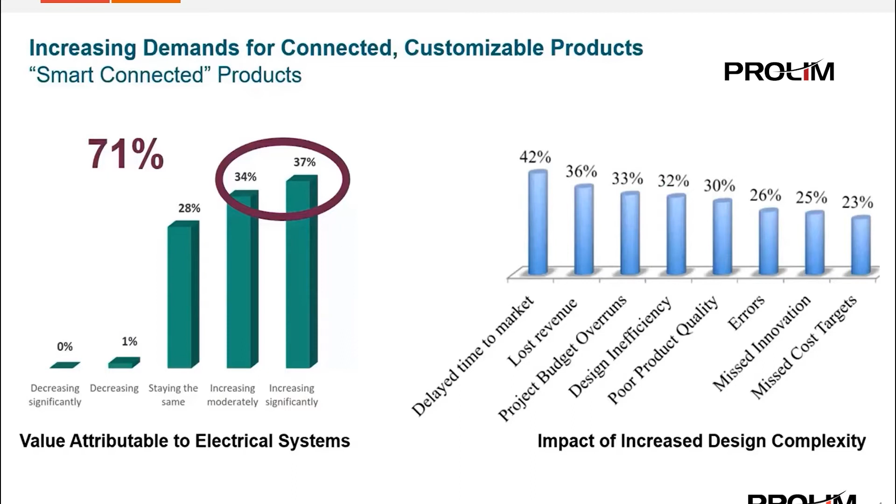Along with the complexities of electrical designs, a great deal of compliance and regulations must be adhered to. Not to mention all the industry and safety standards, these must be met. So it's vital that we have the tools that allow us the ability to control these measures and the visibility and transparency to show that these guidelines are being followed and met.

Like any new technology trend, you must be able to evaluate your current design processes, methods, and software put in place, and identify the areas where you need to improve or enhance, thus the Kaizen, so that you can really leverage and capitalize on this ever-evolving technology and its growth.

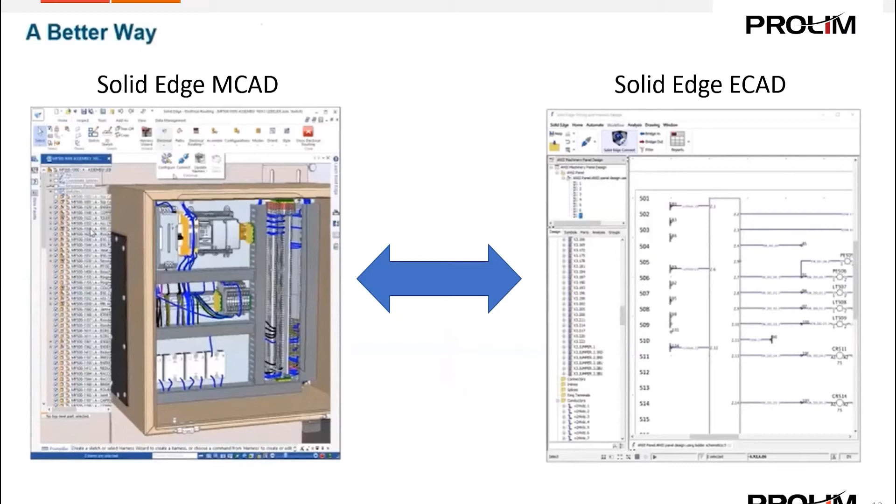Solid Edge wiring and harness design brings these two environments together, giving the user the ability to communicate and share data between ECAD and MCAD environments using connected mode, greatly improving the communication between electrical and mechanical teams, thus saving extremely valuable time and effort during the design phase.

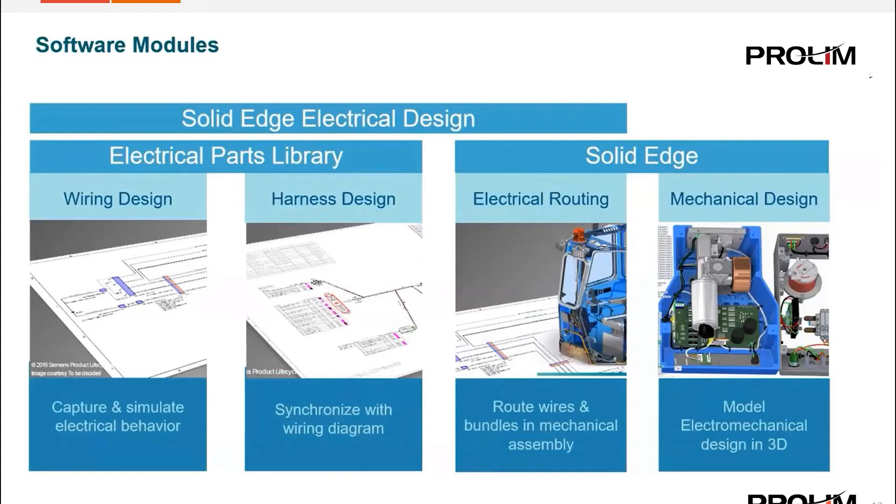It's important to mention here that both the wire and harness design environments can be run as standalone modules apart from each other in Solid Edge MCAD if so required. Many customers only require one or the other. The flexibility is there when you need it. This also makes the software much more affordable, only paying for what you need when you need it.

Here we'll see the value of intelligent diagrams and the electrical parts library. We'll also see styling and standardization and templates, so that all users are pulling from the same central library for their borders, commonly used parts, symbols, and design templates.

We also have design rule checkers. This allows the application to run real-time system checks in the background, consistently checking for electrical issues and validating the system for accuracy. Simulation is another valuable tool that is included in the software. Here you can validate the system by running a simulation to see if the electrical components are functioning correctly.

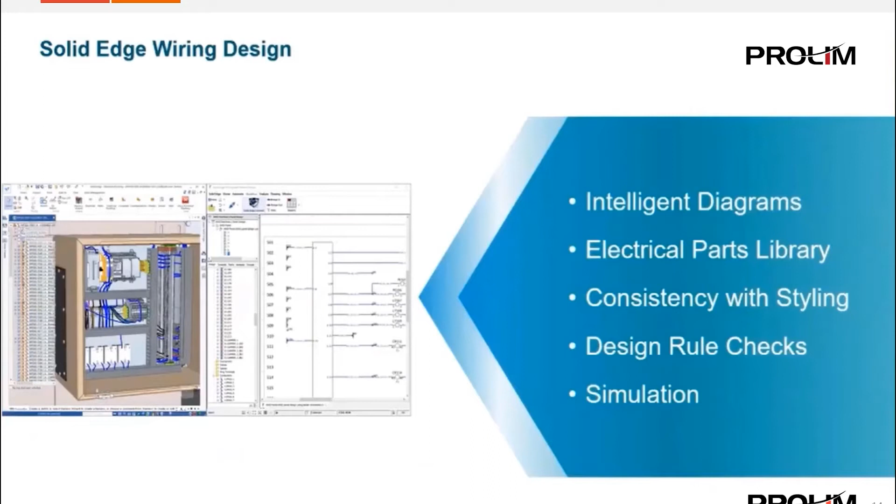For example, moving switches to different positions. We also have the ability to review currents, signal strengths, and voltage going through the wires. That helps us determine appropriate wire size and fuses required for the functioning system and optimizing our design.

The electrical parts library is another vital part of the software. Every seat of Solid Edge wire and harness comes with this included electrical parts library, with over 4,000 symbols and parts and growing that you have to choose from. IEC, ANSI, and other electrical standards are available for install.

This is where all symbols and parts are managed. As users build and add custom, commonly used parts and symbols that may not be included in the library, they are saved to the library so that the rest of the team can pull from them. One central location for all users to access standard components.

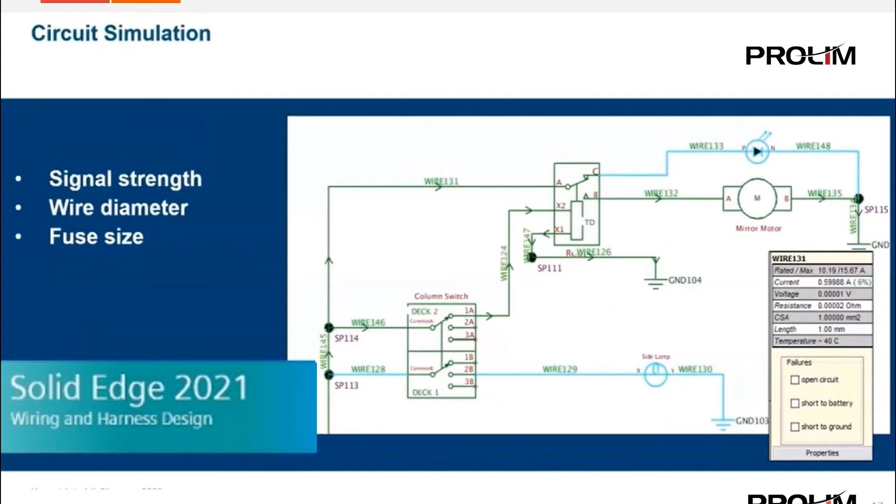For those new to the software, I want to spend a moment on the data flow for this application and its connected mode. Connected mode is a tool that allows us to share data bidirectionally between electrical and mechanical tools, as mentioned before.

Once the data is shared with the MCAD team, wires and bundles are routed throughout the assembly, and any changes needed—wire lengths, plugs, bundles, etc.—can then be shared back to the ECAD team so the electrical components can be updated.

Connected mode also has the ability to take harness design information from Solid Edge MCAD and convert it over to the harness design application. This is what's called 2D flattening—true synchronization at its best.

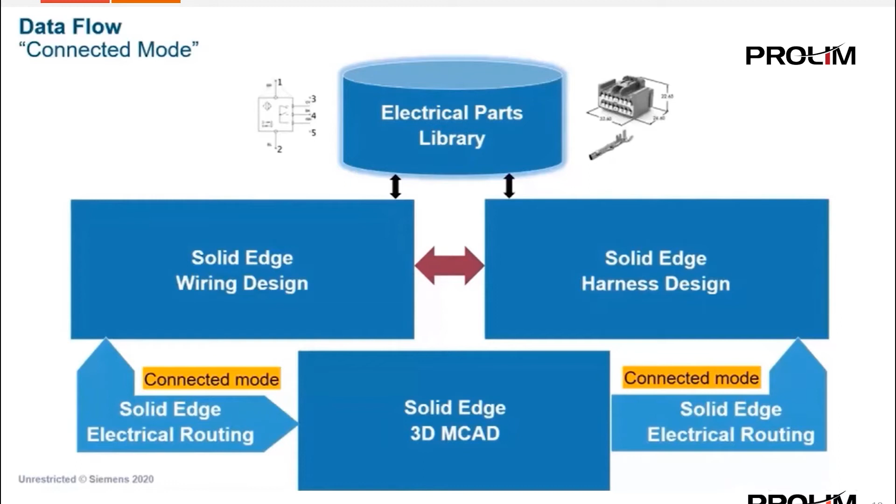Now let's go ahead and take a look at this in action.

Now that we've got the tool open, we'll go ahead and open up a project. I'm just going to use the default Quick Start project here for the Quick Start transportation. Click OK. Now we've got a project open, and you can see there are some categories here that we can select and expand upon.

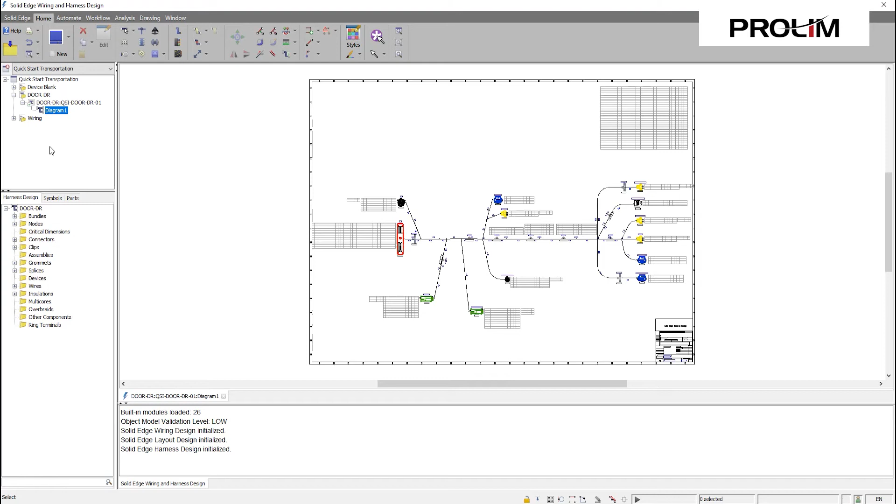I'm going to quickly, briefly look at a harness design. Again, this project can include harness designs and wiring all together in one project bundle. But just to give you a quick overview and a bit of understanding of how a harness design can look.

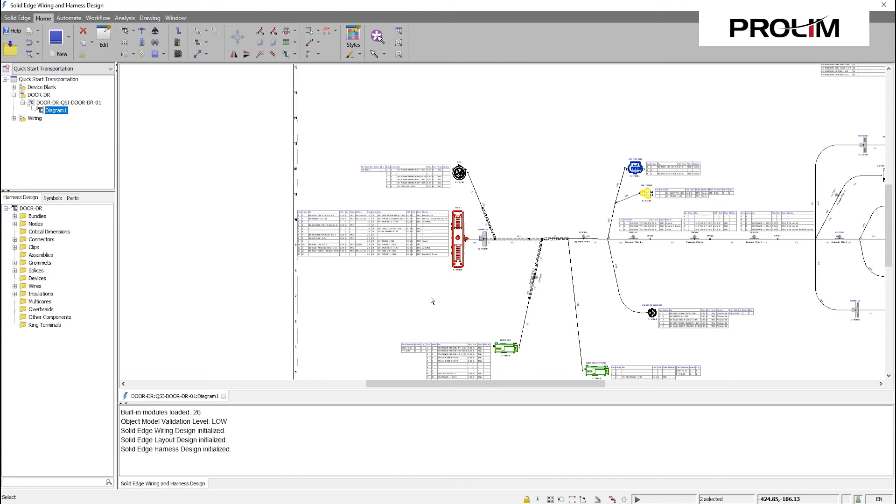So you have your device here on the left, identified by its components. This is more of a visual bill of material—you get the pin numbers, cavities, and a lot of information here. Again, this is all brought in using just the default parameters, but this can all be customized.

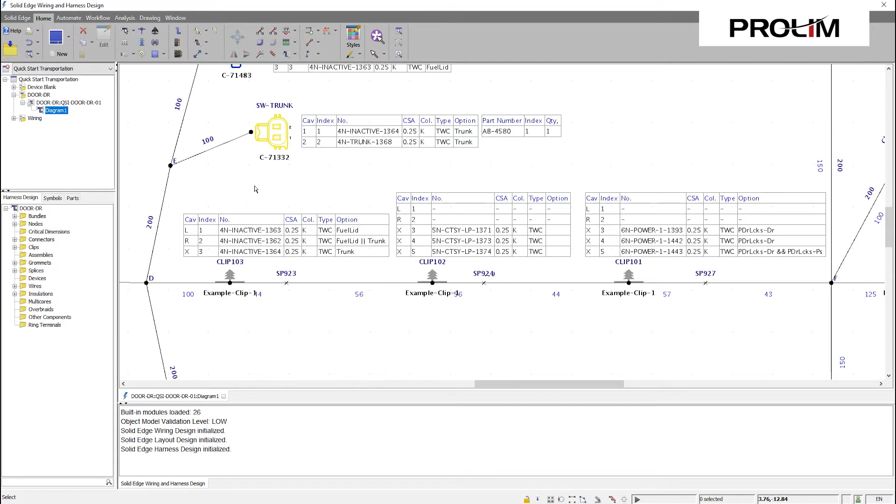I won't get too much into harness design for this specific webinar, but I'll be doing a future webinar to go more in detail into harness design. For now, we're really going to just stick to the wiring design at this point. So I'll go ahead and close this.

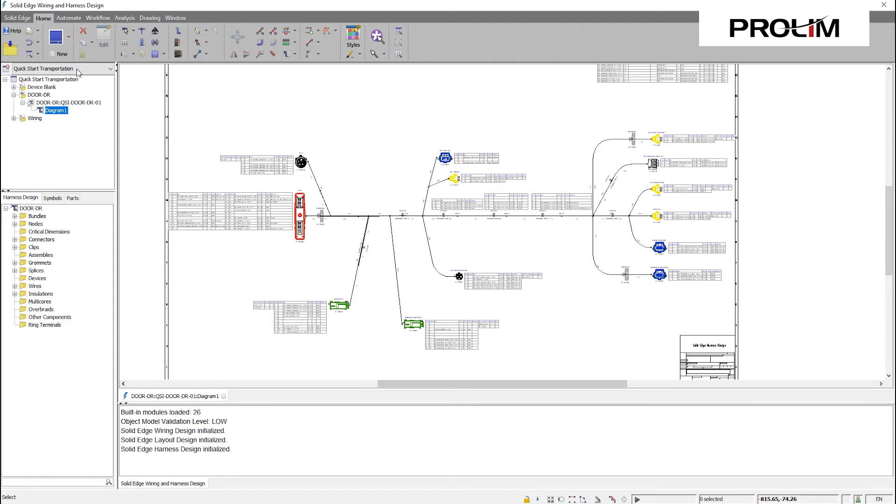Now you can see I closed that design, but the project is still activated and open. So now I'm going to go ahead and look at the wiring diagrams here, and you can see I've got 9 different options I can choose. Each one of these is a different design layout. So let's go ahead and open up these.

One thing to keep in mind on your browser over here: once we have a design or schematic open, we have this design panel. Anything that has a plus, you can see, has components attached to it, and we'll go into those a little deeper as we go along here.

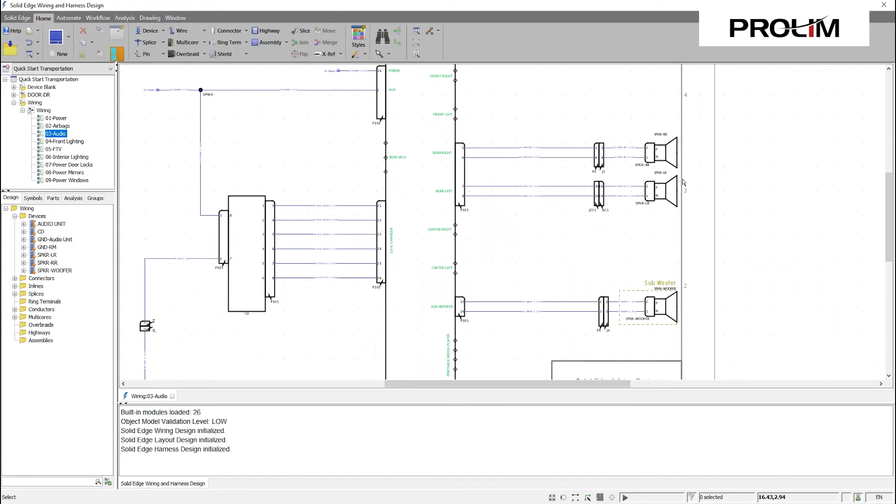Conversely, if you're in the design window here and you're looking for this and want a bit more detail as to what that is, you select it and it's going to highlight it over here in the design tab as well.

I'll briefly hit on how to navigate through this environment. The navigation controls are the same from the wiring design to the harness design. Most of the navigation controls are very similar to all other CAD softwares, but there are a few unique ones with this tool that are different from the others. It may take a little getting used to, but there's a cheat sheet available, such as these stroke commands.

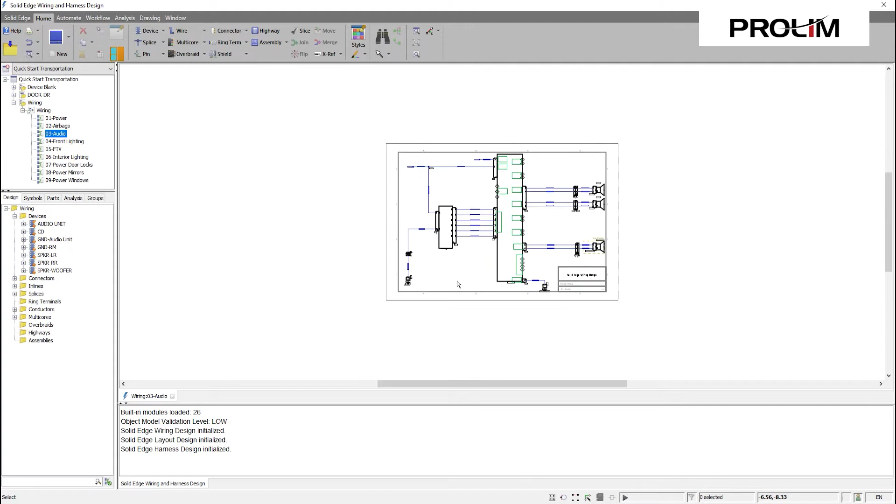As you can see, if I hold in my middle mouse button, it's giving me this red indicator here. Depending on what direction I'm going in, you can see I'm zooming out in increments. Now if I go the opposite direction, I can zoom in. I can also zoom in entirely too far, and then I can zoom out or zoom all.

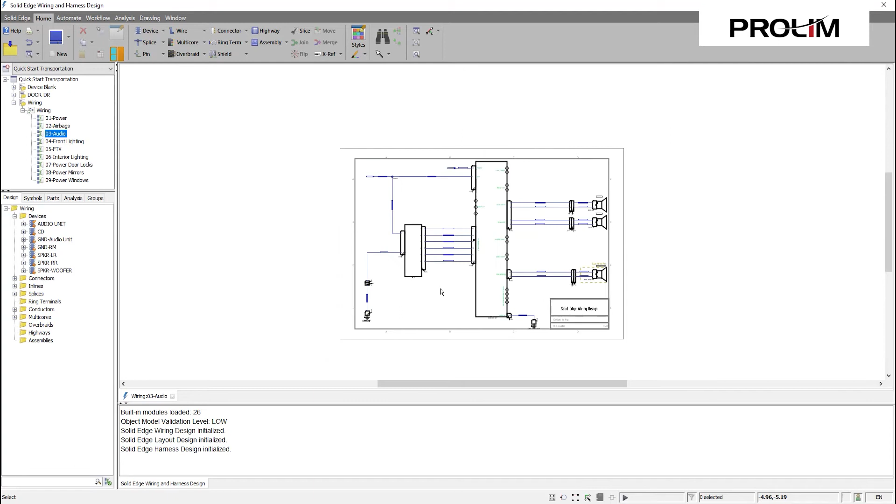Your middle mouse button works as it does in Solid Edge, zoom in and out, scroll up and down, but we won't get too much into that. When you first get into the tool, especially if you're bouncing back and forth from Solid Edge to this, it might be a little tedious. But like I said, within a few days of being exposed to and understanding what those tools are, you pick them up very quickly, and it's not a big deal. It's just kind of a unique tool.

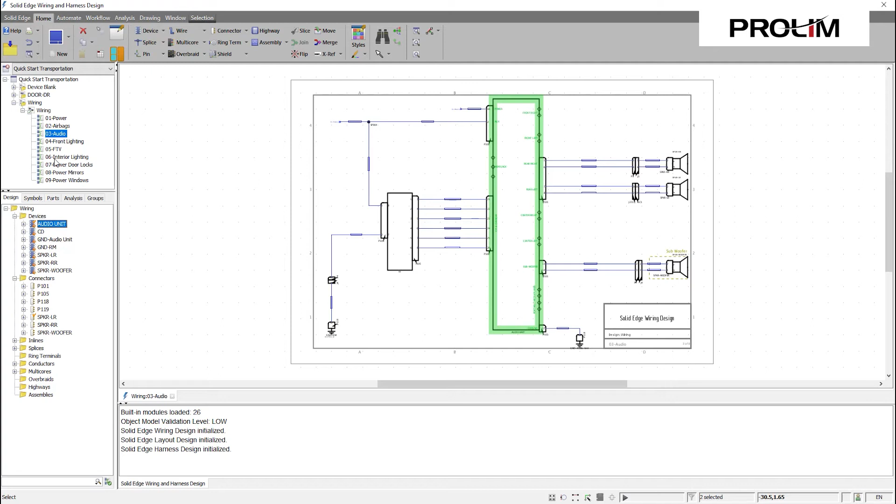As I mentioned before, when you select a device or a connector here, we're able to quickly visualize what's here. We've got 9 different pages that are all part of this one project, so we're currently only looking at what is relevant to this one design, sheet number 3. But we do have the ability, if we know something is part of this design but not on this sheet and need help locating it, to toggle between showing just what's relevant to the particular sheet or clicking this to show all the devices.

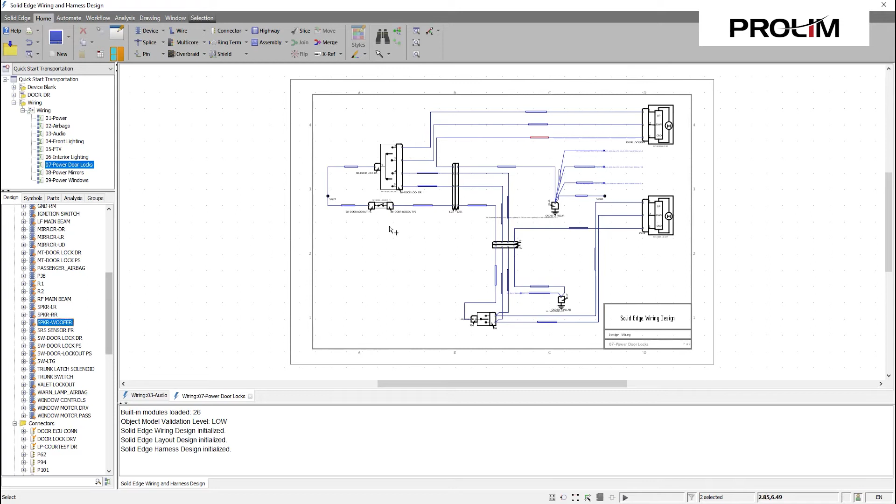Which is really handy. For instance, if we want to find this speaker subwoofer, let me change sheets here. Let's say we wanted to locate this subwoofer that's on another sheet. If we find it here and click it, it's not showing up anywhere on this sheet. So if we just hit Z, it takes us directly to that location. It changed from sheet 7 to sheet 3 and takes us directly into this area, zoomed in, so we can now configure what we need to change or locate accordingly.

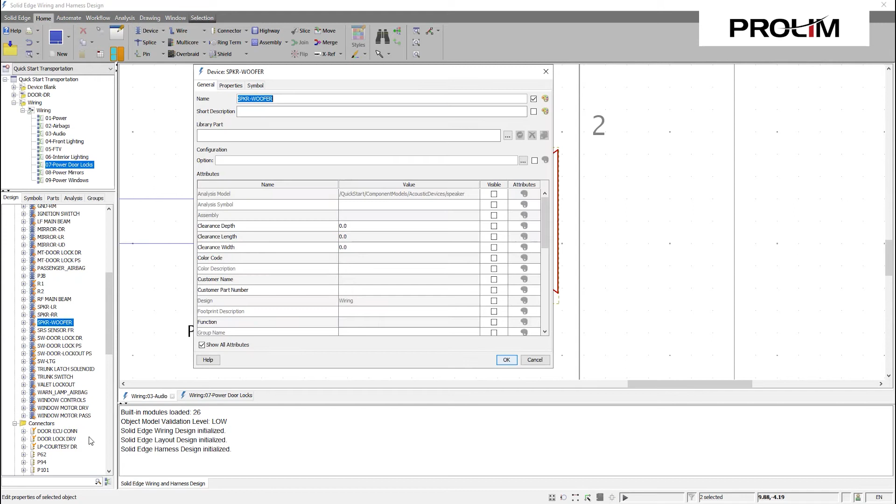Speaking of changes, if we wanted to change this device, we can right-click on the part itself and go to Properties, where we have the ability to manipulate, change the name, or swap it out with another part from the library. We can also see other information in regards to this specific part. At the same time, we can right-click on the actual component itself, go to Properties, and we're back at the same location. So there's a lot of different ways to get to the same information.

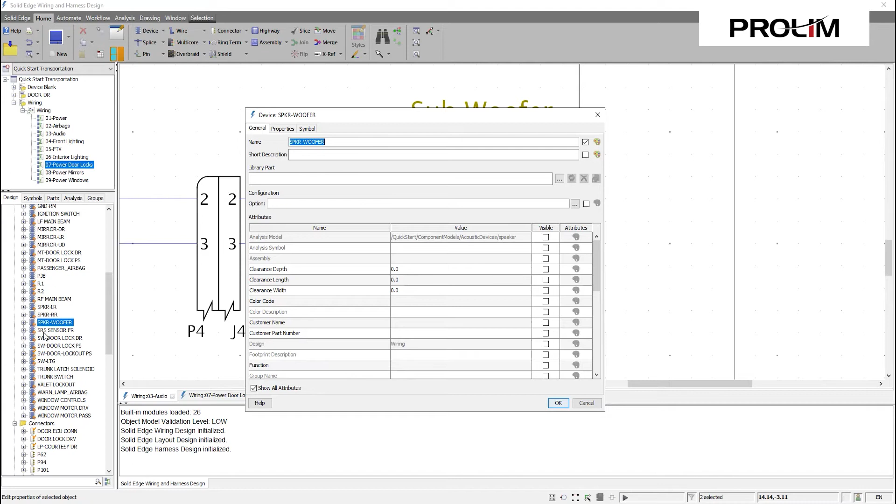Depending on where you're at on your display screen, it might be quicker to right-click directly from the design panel, or if you're in the graphic window, it's easier to just select and right-click directly from there. Again, another really cool feature that's accommodating and fast-tracking your design process as much as possible.

Next, I want to talk about off-sheet references. Off-sheet references seem to be a pretty common question when customers or potential customers are looking at this new software, wondering how you can configure off-sheet references, and whether it allows them at all. The answer is yes. That is set up by default, and not only is it set up by default, but you also have the ability to manipulate and control those templates depending on your company's profile.

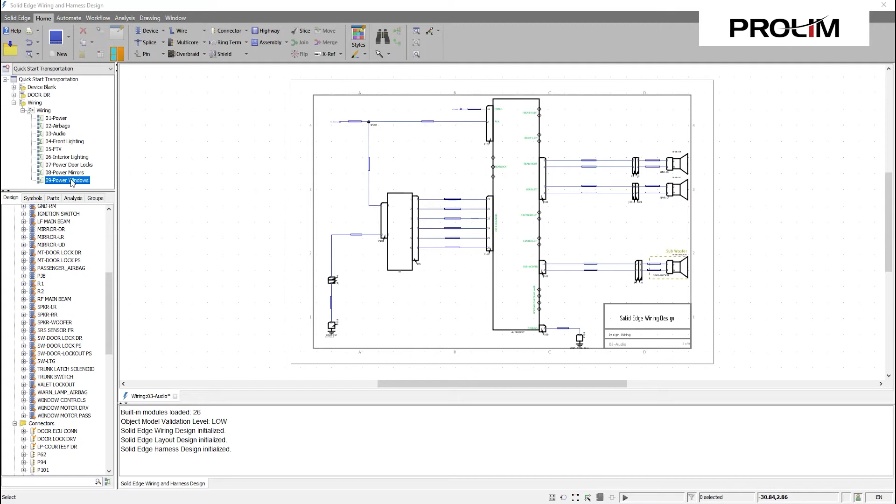So let's go ahead and open up this sheet here. I think this has some off-sheet references. As you can see, this wire is being referenced to another sheet, and these 3 wires, let's just look at this one for instance, looks like it's on sheet 4. The cool thing is the naming convention is dummy proof, it's going to tell you exactly where this wire is also used or being referenced to or from. So it's on sheet 4, front lighting, and you can see that's this sheet here.

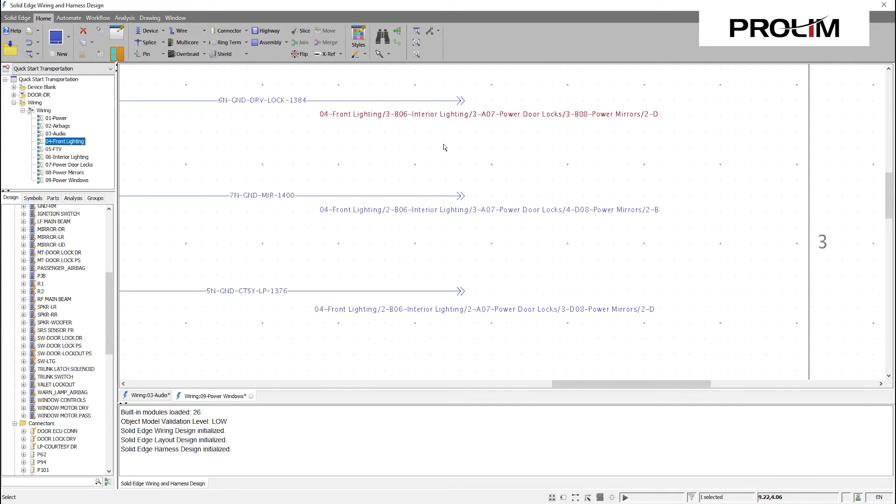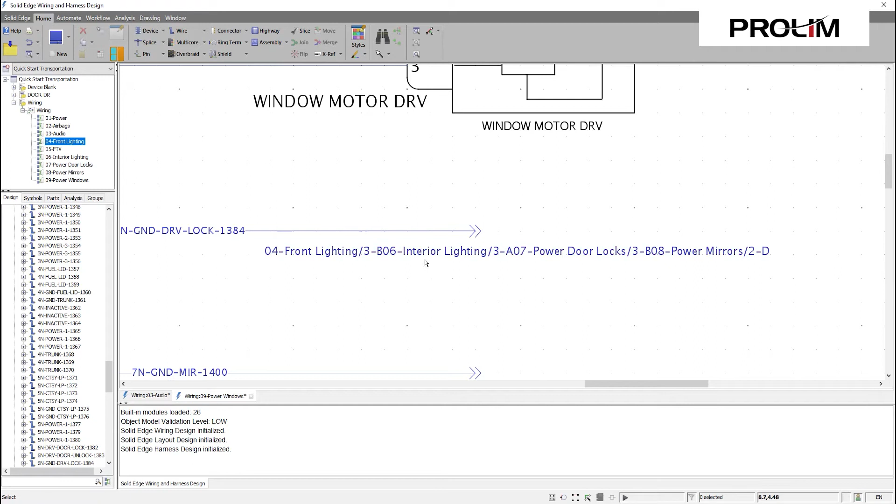The 3-B is going to be the grid location. We've got numbers and letters here to give us a more general idea of where that might be present. You can also tell that this specific wire here is being used on sheet 6, sheet 7, and sheet 8.

To briefly hit on how you would change these to set up your own company standards, you simply right-click on the property, go to Style, and then Edit Style. This opens up this dialog box, which has all the information you'll want to set for your specific needs.

This is for setting up your templates and the way you want these things to look. You can add additional parameters to look at, or remove parameters, but all very easy. From this attributes section, it's very easy to apply the styles or exclude certain parts of the styles.

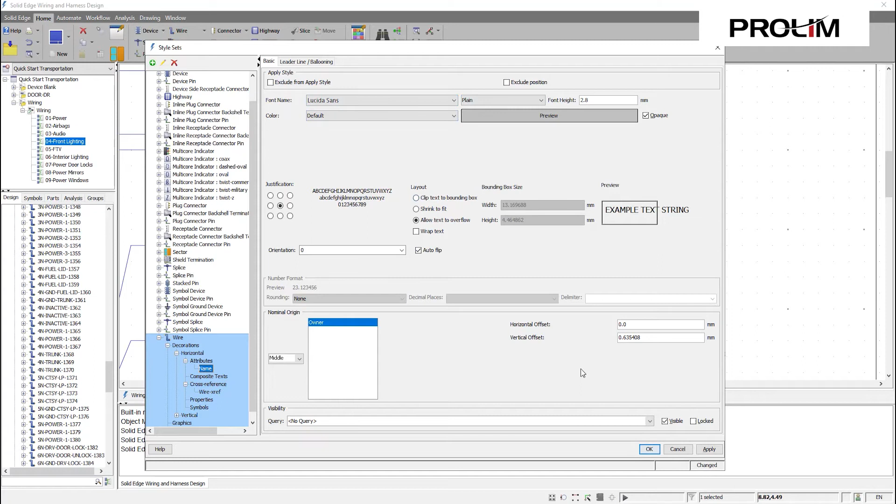Now that we've explored some of the basic functionality of the wiring diagram, let's look at exporting out a project. This is an existing project, and shortly we'll go through creating a new wire diagram so you can get a feel for how to create these things from a high level view. But for now, let's say we've got a project complete, and now we need to export this out to share with the rest of the team.

If we go up here to our Home tab, we have this print control. In the dropdown we have print and print to file. We'll go ahead and select print to file, and we're going to output this as a PDF. It's a pretty common exporting format that most people can use if they have access to just a simple computer.

You can see here we have the option to select either the entire project to convert, just the specific design we're looking at, or a diagram in specific. If we just wanted to use one of these diagrams, we have the ability to do that. But for now, we're going to go ahead and just do a design.

We want to select PDF now, but you do have the option to output this as a DXF, a CGM, or an SVG file. For now we'll just select PDF. Again, we can configure that if we wanted to go in here and make some changes, like color it from black and white to color. The black and white, at least for this setting, doesn't work too well, so we'll use color.

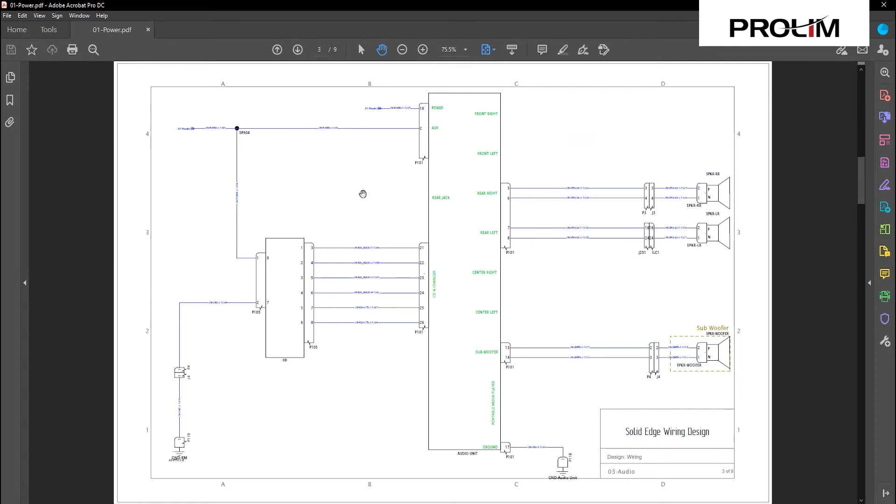There we go. Now the PDF has been converted. You can see down here in our window that it's done converting. The cool thing is now we don't have to navigate to that, we can literally just grab it right from here. So we double click this text, pulls up our PDF, and you can see now we've got all 9 sheets right here, very easy to use, laid out in the same order as the design itself.

If we look at our bookmarks over here, we have previews of each one, and each one of these titles has been brought over as well. So again, a very simple, easy to use exporting option, a great little tool, and we can save this out and now share it with people that don't have the actual tool for review, whatever it may be, even for installation if that's the case.

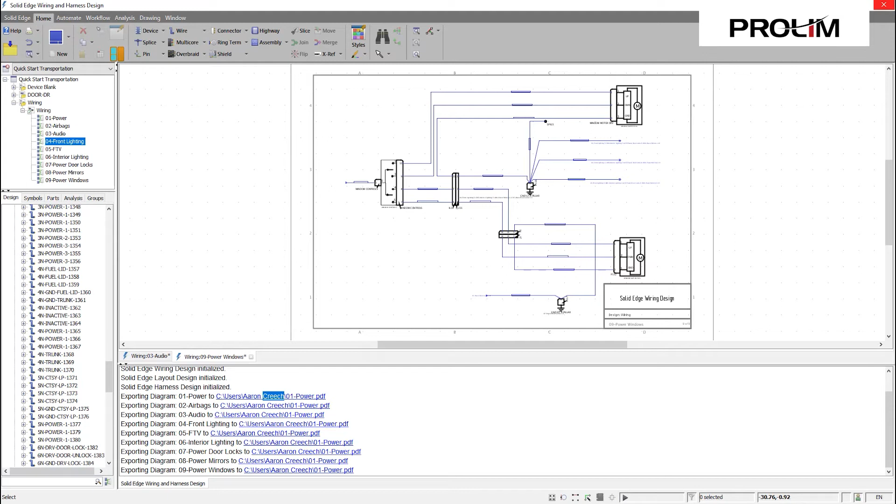Now let's explore the toolbox a little deeper here with our existing project. We'll go over to the Drawing tab, and you'll notice we've got this handy little Add Diagram List table. If you hit the dropdown here, you see we have the ability to generate a diagram list, a device list, a wire list, whatever we're looking to pull from. So I'm going to go ahead and do a diagram list for this part here.

You simply select it. I don't have to select any of the parts. It already identifies that I want to create this list on this specific sheet.

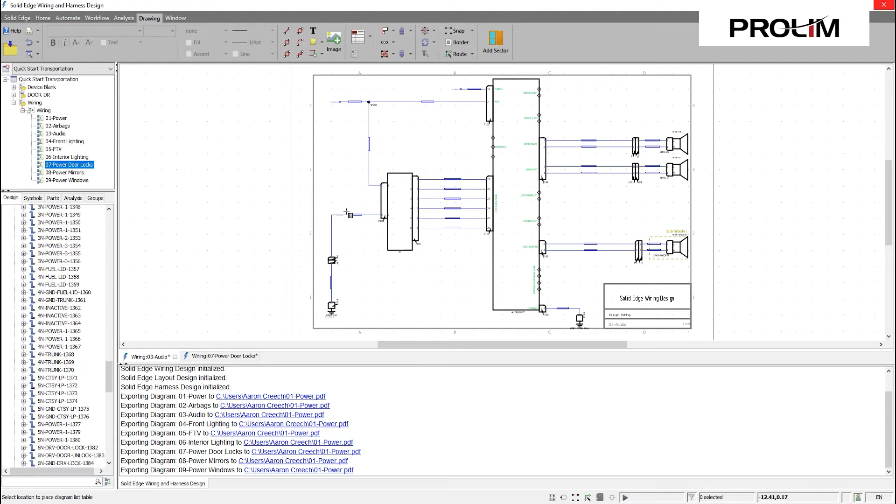So again, you can see my cursor's got the little graph on there, so it's already telling me where you want to put it. Go ahead and place that here, zoom into it a little bit, just to get an idea of what this is looking like.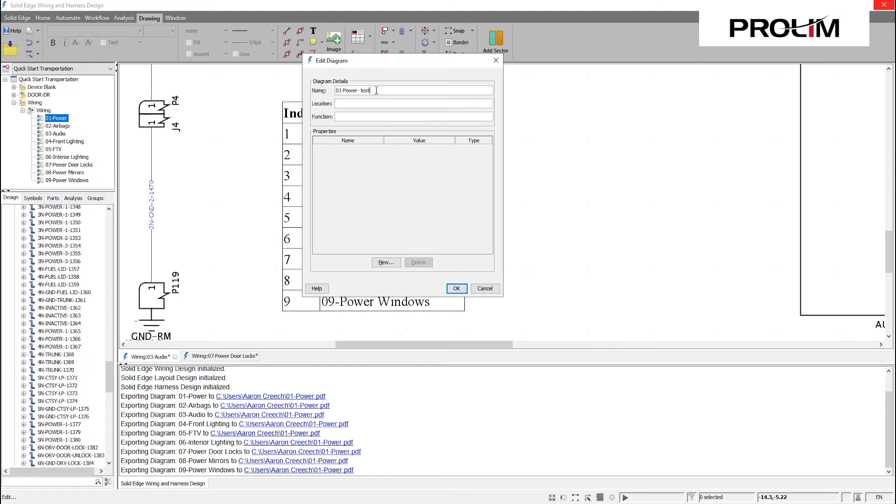So again, it's giving us a diagram of all of our sheets, the names, and this is all dynamic. So if I wanted to change any of this stuff, let's go ahead and change power. I'm going to edit this, I'm going to add test. You see that changes immediately, and it also goes to that sheet.

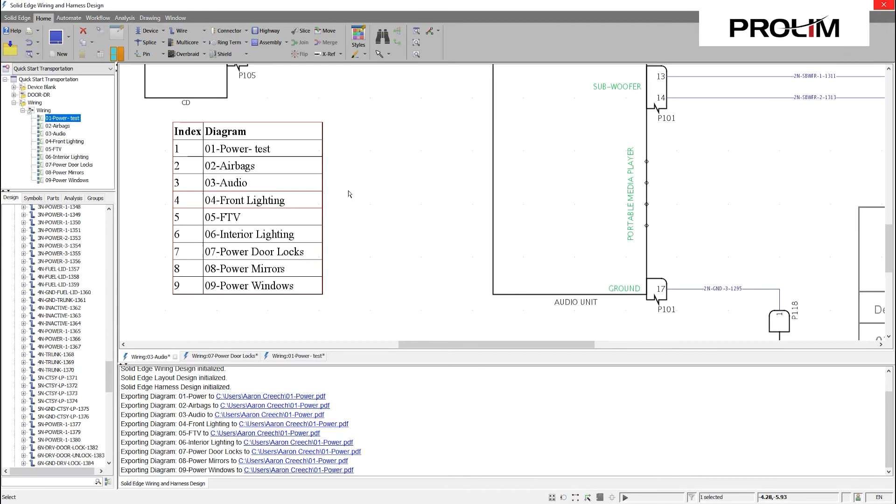So if we go back to our wiring diagram, you can see it's here, and now it's relabeled that tab as test as well. So you change it in one location, it's changing it across the board, which is a very handy tool. And again, you can move this anywhere. You have the ability to go in and add some additional columns if you needed.

But let's go ahead and move over to another sheet here. So we'll look at another, back on our drawing tab again. Now this time we'll do a device list. What this device list is going to do is populate all the devices needed for this sheet. So depending on the complexity of the design, when we drop this here, usually it's a pretty big list.

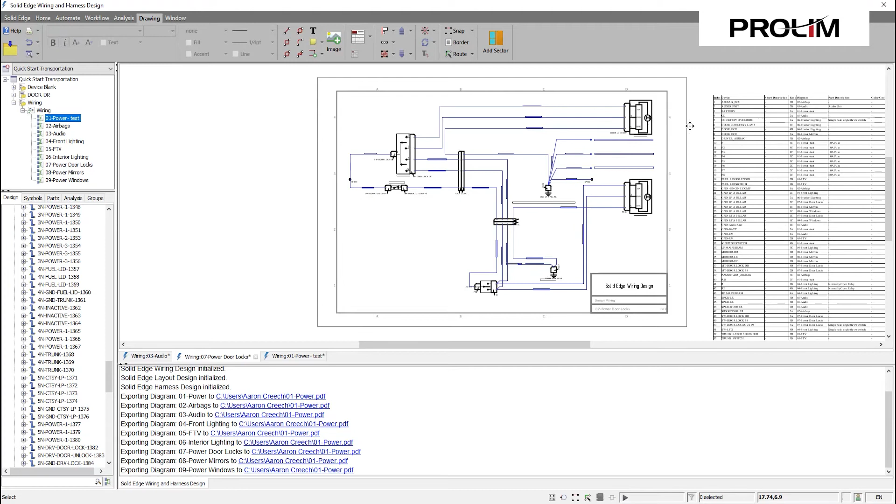So we'll put it over here for now. And you can see I'm not having to do anything, I don't have to select anything. It's just populating that based on the intelligence and the information that it already has there.

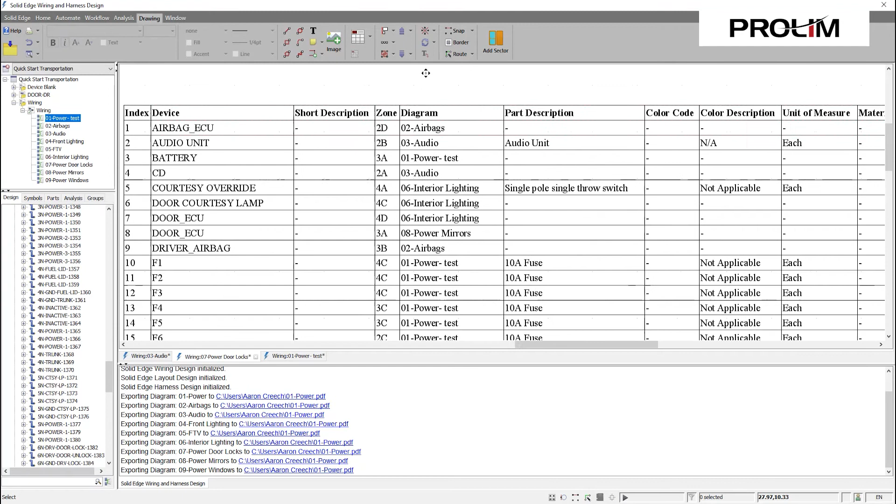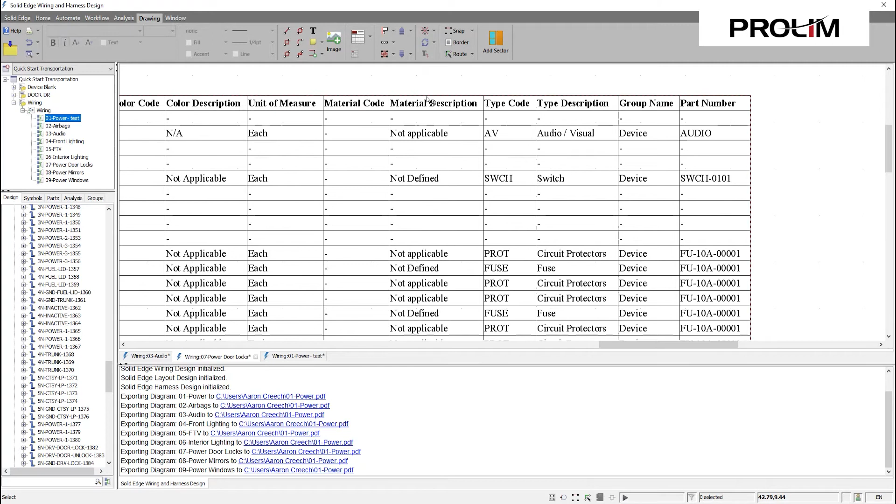So we'll zoom in here, look at it a little closer. And you can see that we've got a full list of all the devices included in this sheet, what diagrams they're associated to, a part description, and a ton of information that's here just by default. And again, you can go into your style sets and change and add and remove any of these columns as you see fit. We can move this thing anywhere we want it to be.

This would probably go in a separate sheet, but again, just at the very simplest form of creating documents. It took me a second to create that.

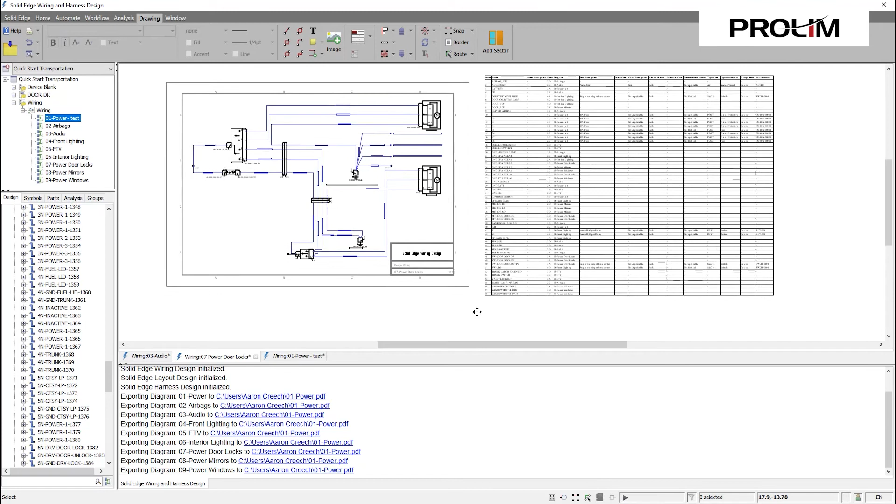And try one more, we'll go into this sheet here. Now we'll do the same, and we'll just do a quick wire list. This one may fit - nope, it's even bigger. So this is going to give you an even closer look at each one of the wire names, where it's coming from, what pin connector it's attached to, what cavity it's connected to, where it's going to.

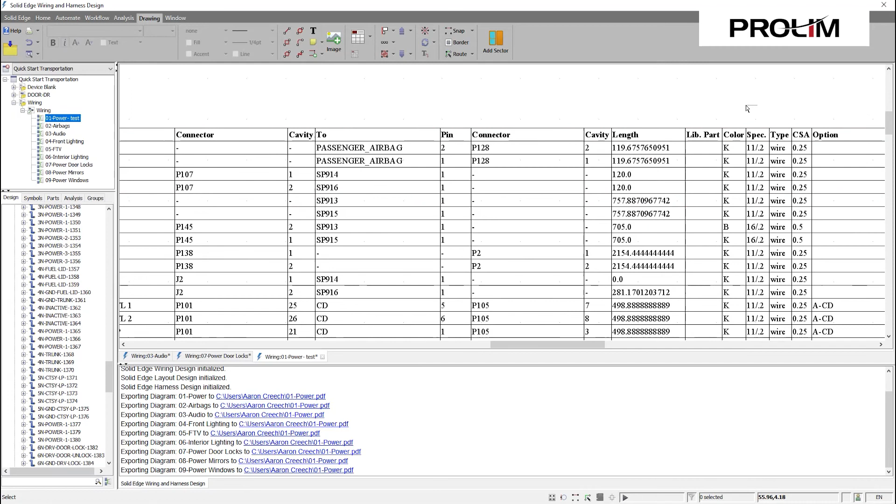And then you've got your full length here as well, so your cable lengths as well. Again, this is all just default information that is given to you. So very handy, and that's going to be a big Excel sheet there, but you get the point. It's very easy to create these basic lists.

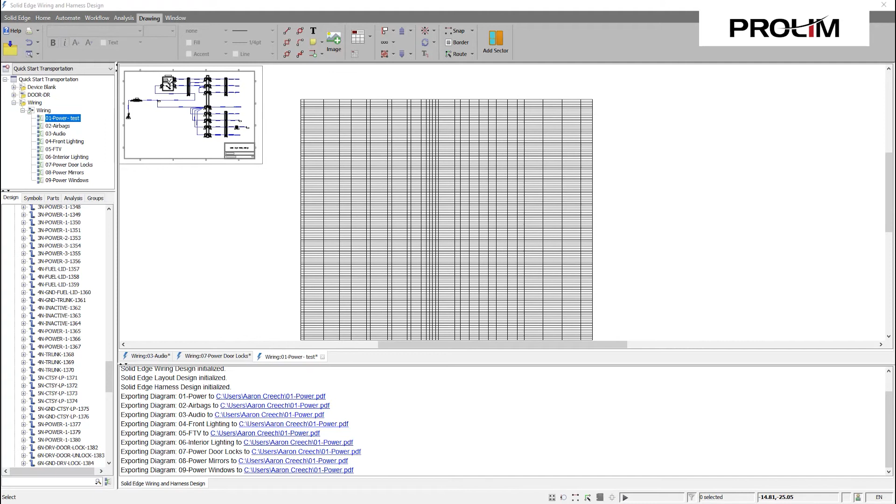So also included in the software is a really handy reports section. If we review the workflow tab, we can see here we've got this really big reports command, and it's got another drop down. So we have the ability to go into create reports, and there's already some pre-populated reports in here.

All of these are pretty common reports. Just to look at a few, you can do a connectors list, you can configure wire lists. We're just going to look at this design wire list, and let's view this report real quick. Generates.

Now the reports default to an HTML export, but you can see it's a pretty intuitive list. It's got all the information you would ever need in order to have these wires cut, and to give off to your purchasing department. Very intuitive list. And you do have the ability, once you have this open here, to save this and print it either as an HTML file or a PDF.

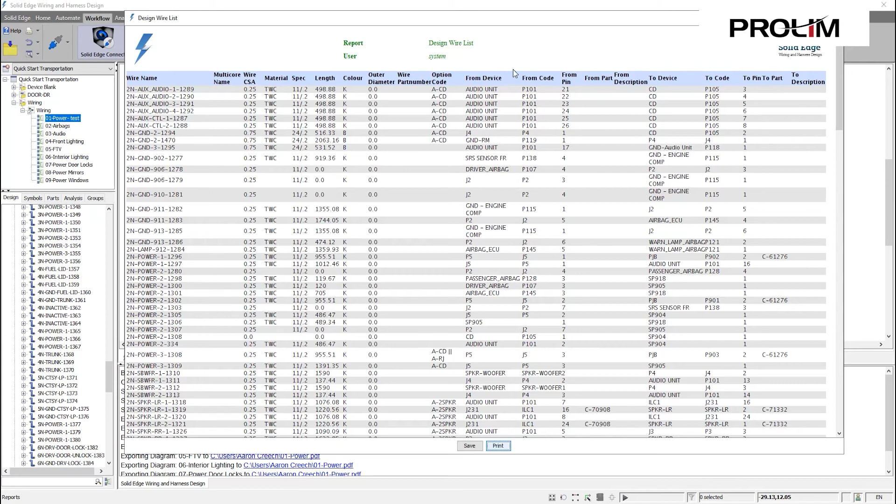This may take a minute, so I'm not going to actually do it, but if you have a CutePDF or Adobe PDF Writer, it just prints directly to a PDF. Again, these are just the default lists. You do have the ability to go in and build your own lists, and I won't get into building them too much. This is just an overview. But this Help tab will actually pull up very intuitive, user-friendly instructions on how to create your custom reports.

That's kind of a brief overview of how to work within an existing project. Again, there's a lot of tricks and tools this application has that we can really get into, but I just want to create an overview so you get a brief understanding of its power. As I said, I will get into much more detail in a few upcoming webinars for people that may not be familiar with this software yet. So I'll go ahead and close this file.

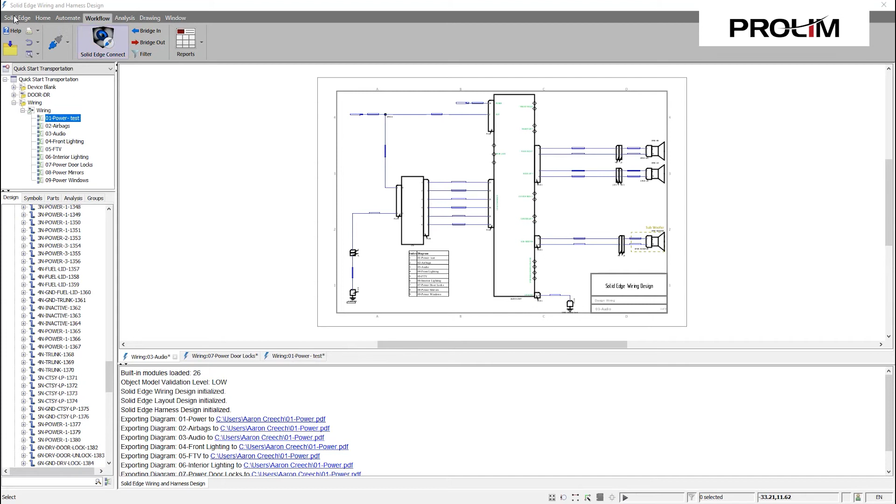Next, we're going to look at stepping through the process of creating a simple new design. We'll create a simple circuit, and then run a quick simulation on that circuit to feel the power of the simulation and see how easy it is.

I still have the current project open, but there are no designs open. So I've got a couple of different options to create a new design. I can right-click on the project header and go to New Wiring Design, or I can go up to Designs and select New Wiring Design from there.

Now we have the ability to create our name, and I'll show you something here. I'm going to name this Wiring, and notice right off the bat it's red. This tool is very intuitive, and it's restrictive as far as being able to have multiple devices or components that have the same name. It really tries to prevent you from having duplicate objects that may be a little different but have the same name. So this is one of those handy visual warnings, helping you get over that challenge. So I'm going to go ahead and just create the new design.

Again, you have some ability to determine the location or functionality. I'm going to just go ahead and hit OK here. And again, working with a default installation that I've got, there are no styles or borders set up. I don't have anything really set up here. So you have the ability to go into the settings and create your own custom company templates and borders.

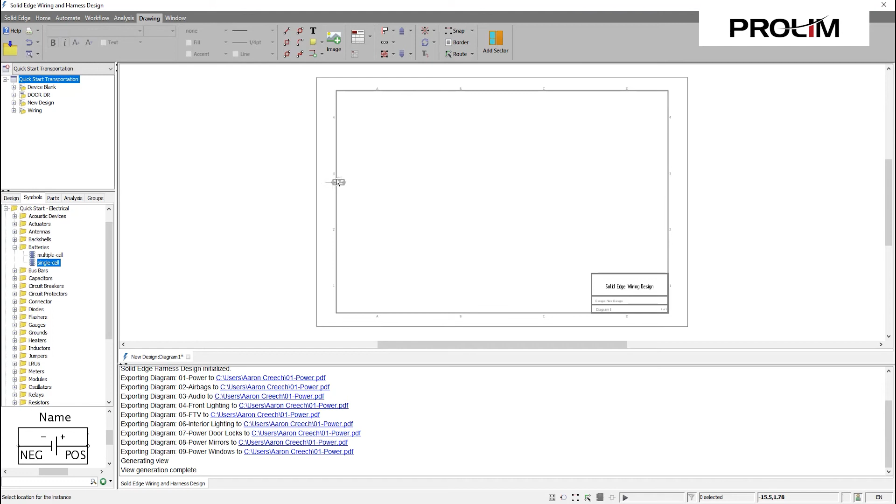It's simple, just double click, and you can see I'm bringing it in here. Now one thing to quickly identify is that it's snapping to a grid. So this Solid Edge Electrical tool uses a minor and major grid point.

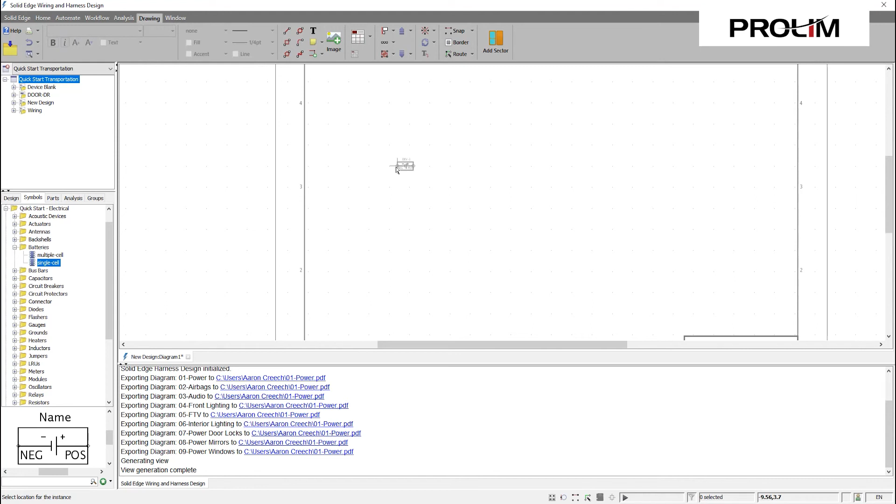If you're experienced using 2D schematics in an AutoCAD environment, where you can put things wherever you want, this is one of those control mechanisms built into the system to keep you from putting things where they may not belong. As we build this, you'll get a better understanding of why that's necessary.

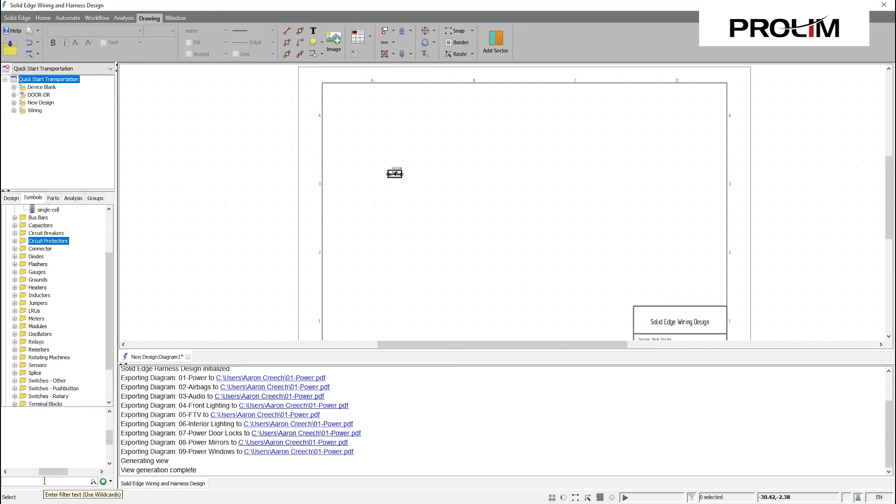We'll select this and drop the battery here. One thing to keep in mind is we're able to search for the battery and it gives us a couple of different options. But notice at the bottom there's a little browser window, so we can also search and filter by text. If I just type in battery, we quickly see just the battery type, which is handy when you've got a ton of parts in here.

Search for switches, and now it's going to just show us switches. We can look for lamps, and now we're only seeing the filtered results. So it's nice to be able to see everything in case you're not sure what you need, but it's really good to have that filter mechanism built in as well.

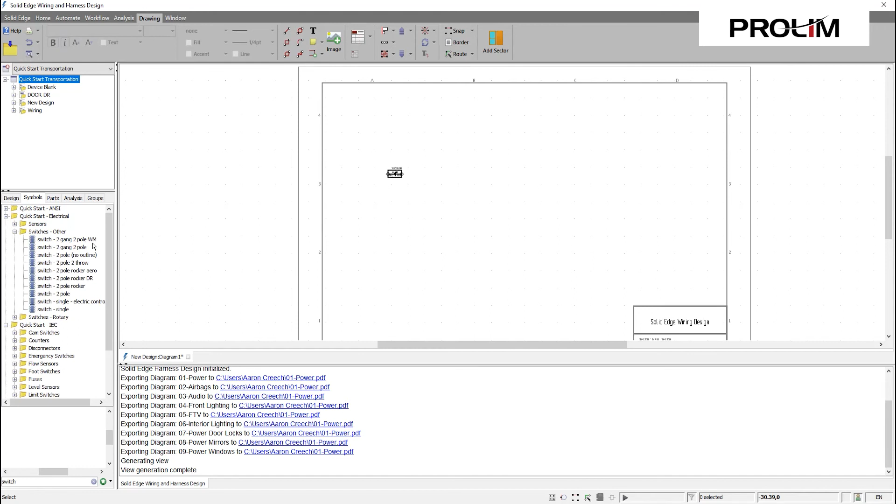We'll go to the others here and look for just a single switch. We'll bring that in, and again you can see how it's aligning up. So now we've got our switch in place, and now we'll search for our lamp. Let's grab this guy.

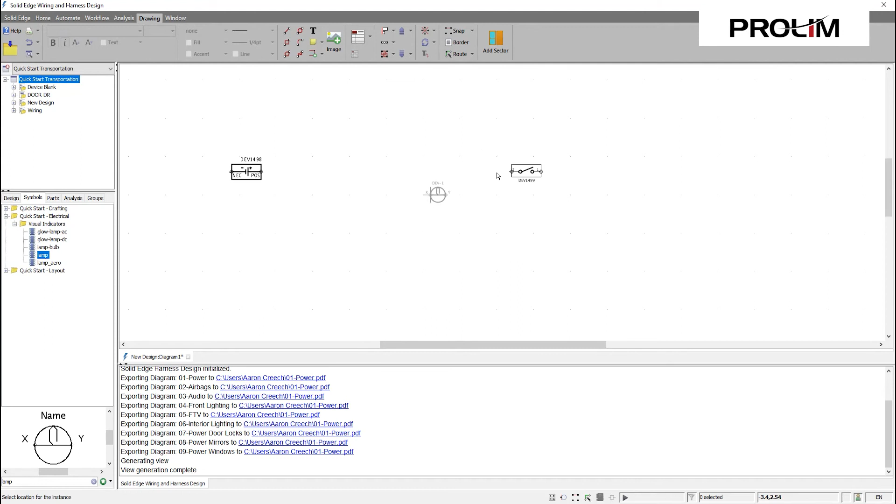Now all we need is a couple of grounds. Put this guy down here. Another cool thing is if I just select this, hit Control C, Control V, now I'm able to copy and paste those as I need. So pretty user friendly.

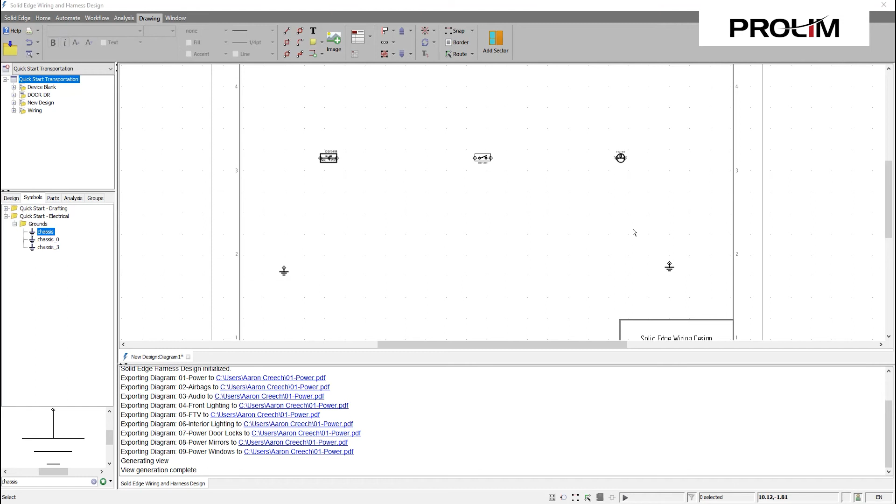Now that we've got a couple of components populated in this new design, if we go back to our design tab, we'll see we now have devices highlighted here. So we're able to keep track, and if we cross-reference by selecting one, it highlights in the graphic window, and the same thing happens if we select it in here, it highlights over on the left. Very handy, very user-friendly.

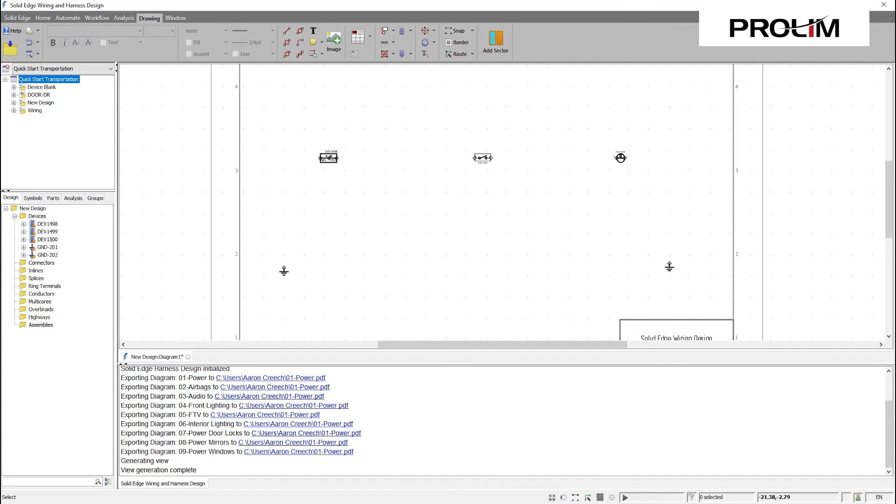Since this is a new design and a fresh install, everything's coming in as default naming conventions, which can all be configured and set. But just to show you how easy it is to change some of this, let's go ahead and rename some of this stuff. We just double click on the name. We're going to call this guy the battery. Here's our switch. And here's our lamp.

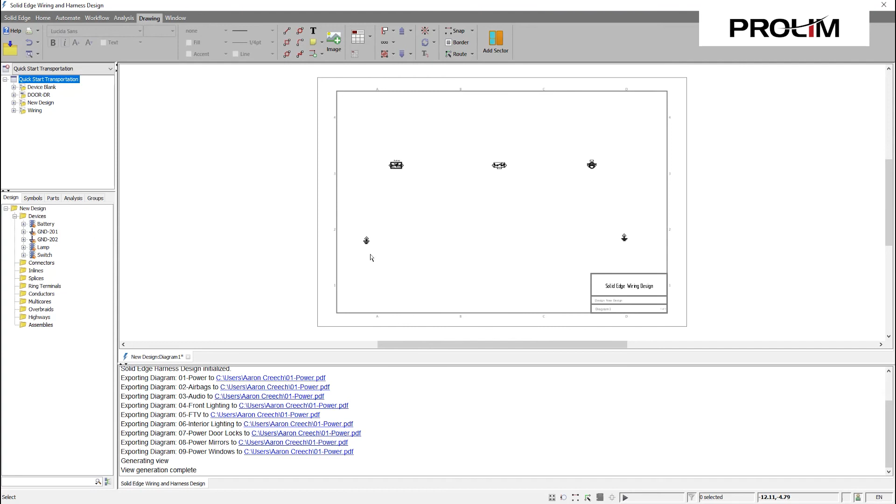And again, it's all dynamic, so as I'm changing it here, you can also see it's changing over here as well. We've got ground 1 and 2 here. So now it's starting to come together a little bit.

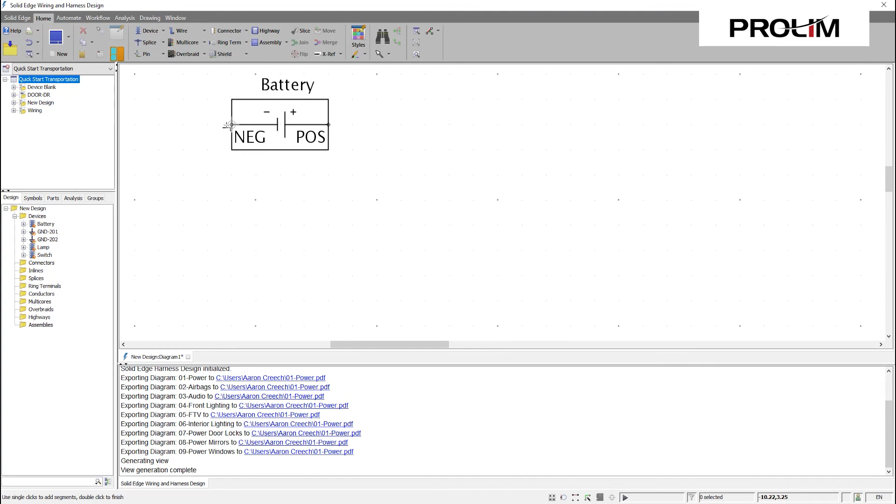Now all we have to do is go back to our home tab, and you can see we've got devices, splices, pins, wires. We're just going to add some wires here to connect this. This is where that major and minor grid really comes into play. You can see it's really snapping to those endpoints almost instantaneously. If I select endpoint to endpoint, hit enter to accept, you can see it already knows this is a wire, so it's already creating the offsets we need.

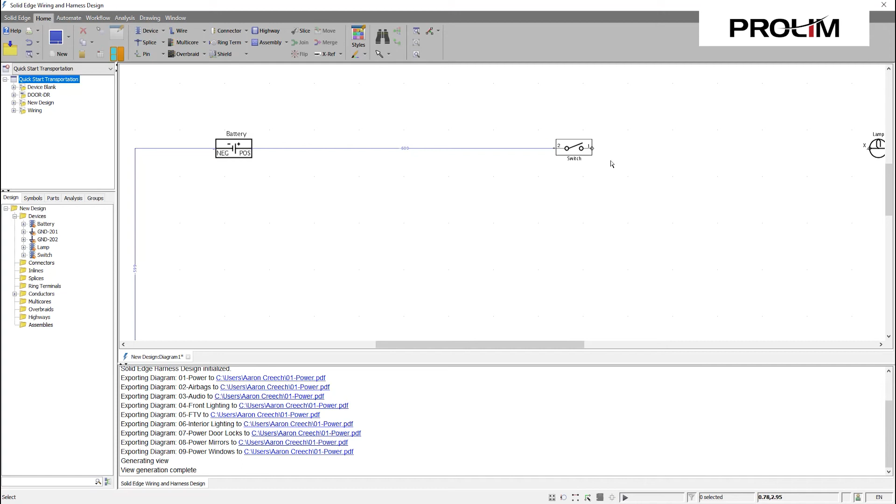So we got some quick shortcut keys. If we just continue to hit W, that brings us back into our wire command, and we'll keep doing that. It's important to note that as we're going through this process, you need to make sure and verify that you're selecting to those grid points, otherwise you may get an error.

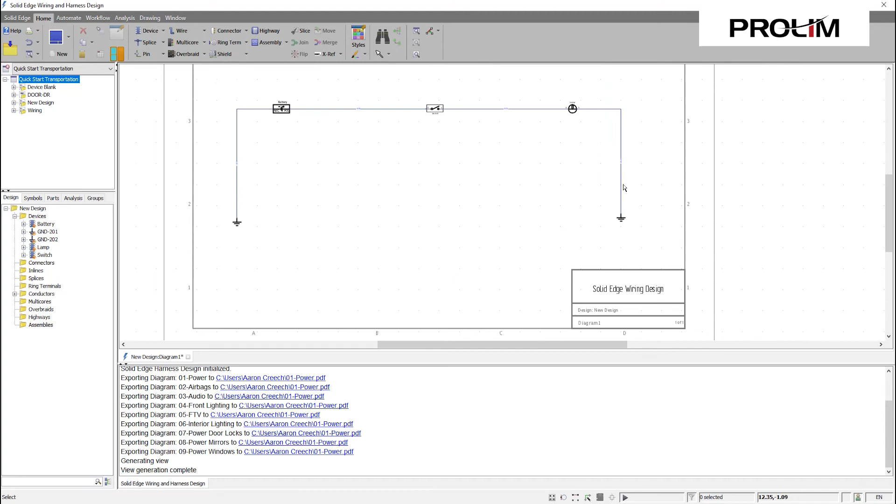And there we go. So now we've got a simple setup, and you can also see we've got some generic names in here for the wires, and each one of those is a unique wire name. We have the ability, if needed, to simply double click wire number 1. Now you can see it turns red because I'm trying to name it the same wire name as the first one, reiterating the inability to have multiple things with the same name.

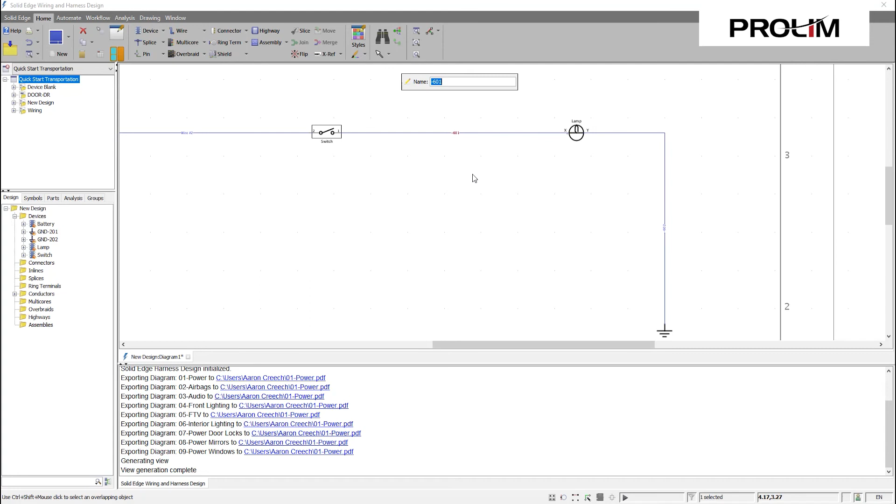Now, to get around that, if you absolutely need to have two components that are different but have the same name, you do have the ability to go in and manipulate those names in the style sets. You're kind of just forcing it, hiding the actual generated name, and then creating basically an alternate name for that device.

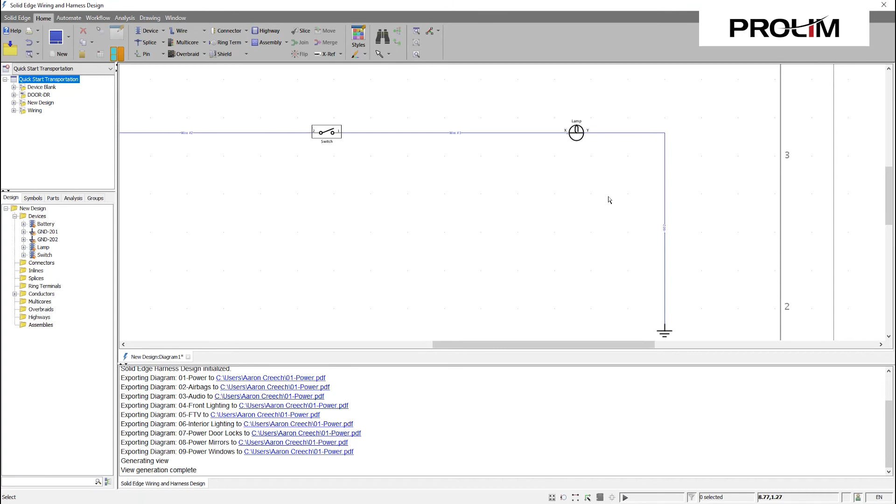And again, it's all dynamic as I'm changing it here. It's updating over here in my conductors, wire 1, 2, 3, and 4.

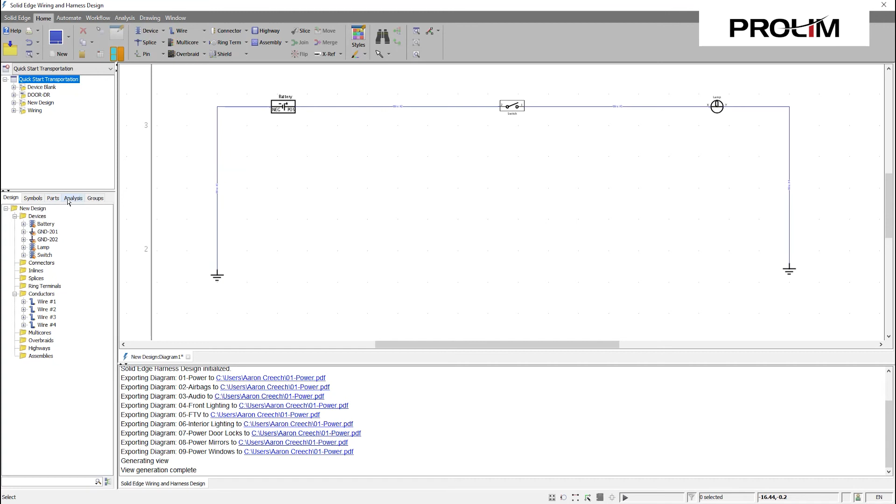So now I think we're ready to go ahead and simulate this simple circuit here. Very, very easy. We'll navigate over here to our analysis tab. Unable to set scope, so first we've got to create a scope. I'm just selecting, and it's implementing or pulling in all the information that it needs, so I don't have to change anything. It's already ready to simulate.

So I'm going to go ahead and hit run the simulation. It's running on the other screen here. And now it's completed the simulation. It's given us some results here.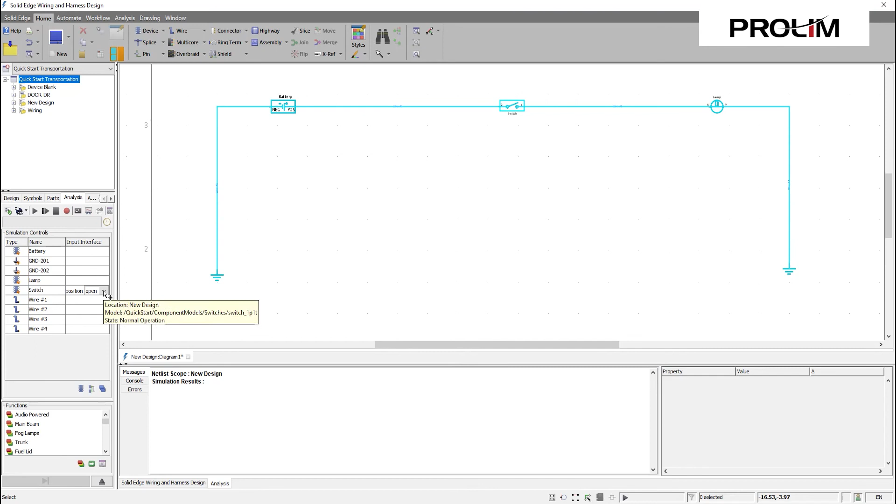So if you remember in my previous slides, I mentioned when you run simulations, you get different colors that tell you different things. By default, the cyan is telling us that this circuit has no connectivity—there's no power running through this circuit. As you can see here, it automatically recognizes there's a device that has a few different positions. So if we choose this position from open to closed, it regenerates, and now you can see that it's a green circuit. It's fully operational and is operating as intended.

Again, a very, very powerful but yet very easy to use tool.

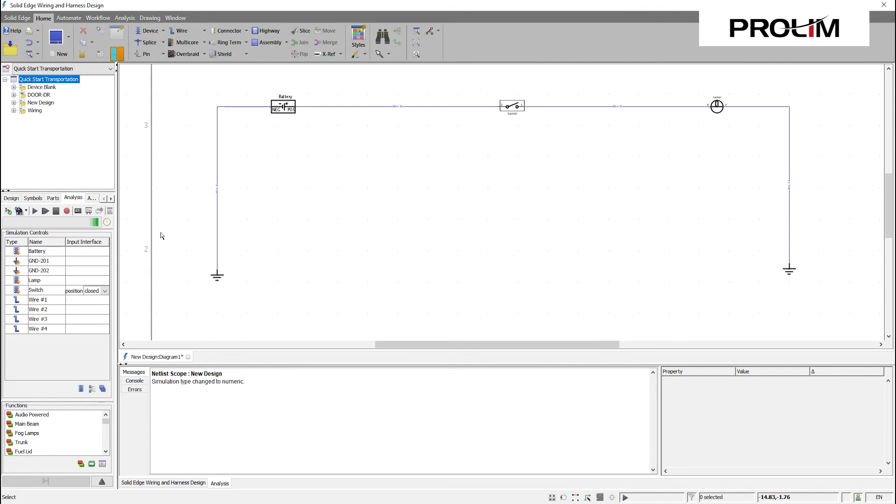Now, if we want to, we can go in and dig a little further, and now we can create a numeric simulation. What this is going to do is basically repopulate the study simulation, and now it's going to give us a little bit deeper information. So now when we hover over this, we can actually see the current and voltage that's being run through this simulation. We have the ability to close the circuit out, short the battery.

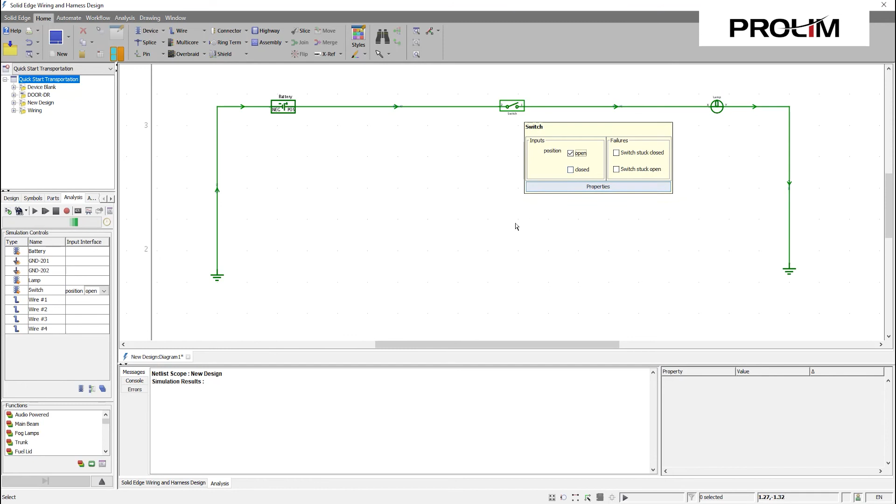Pretty handy stuff. And again, we can even change the position over here, but if we hover over the switch and turn it back to open, you can see it's going to rerun that and turn us back to cyan, meaning there's no connectivity. So we'll go back to closed. Again, very, very handy, very easy to use, yet powerful tool.

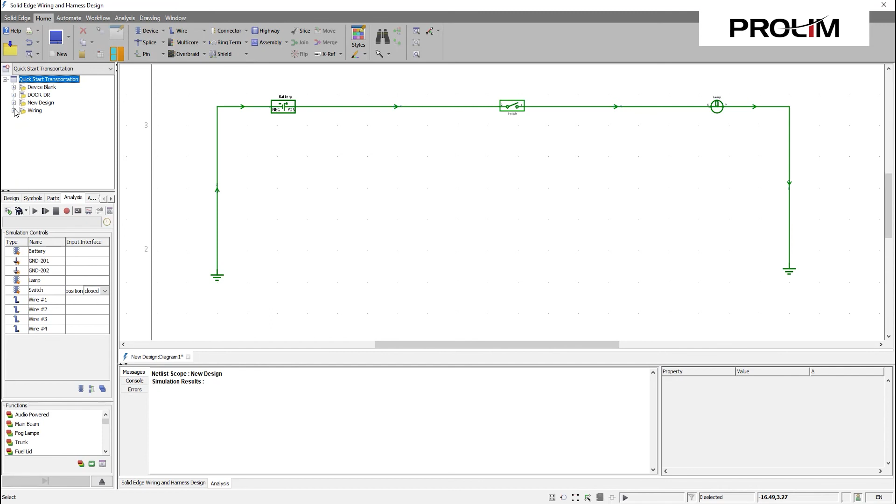This is a very simple simulation that we created just from a simple circuit that we developed. If we were to go and open up another device, let's say we open up one of these previously reviewed designs—we don't have to do anything special with this one. Now this is a more intricate, more detailed system here.

And again, if we just go to our analysis tab, we select to generate our scope. It's writing our scope. And now when we go through here, you can see that it's identified all of the different devices that are attributed to this design. So now we're just going to hit simulate.

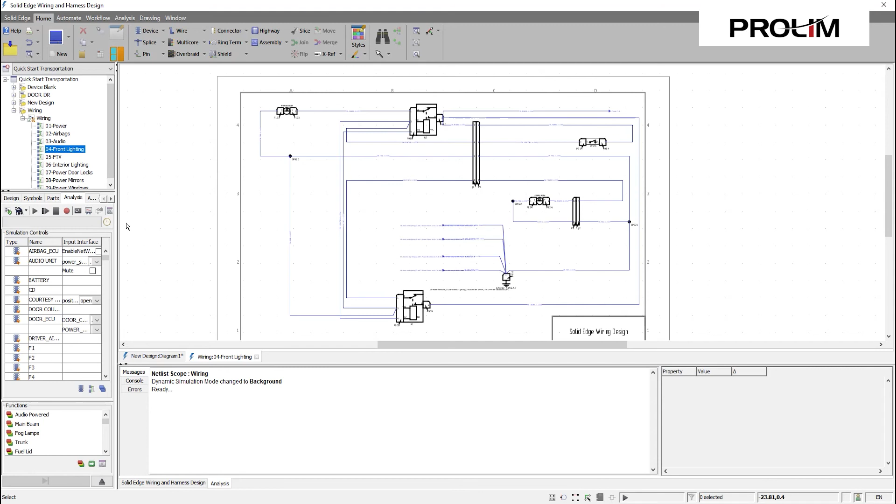This may take a few minutes. It's running the simulation in the background. And now you can see it basically does the same thing. It's going to default to have any switch that you have off. And you can see all of the different controls are immediately automatically identified, and you have the ability to go in and test each one of these.

Now I'm not really familiar with this individual design, the system. I didn't design it, so I'm a little unfamiliar with it in terms of what happens when I turn certain things off or open. But you can see as you go through and toggle these things, it's going to repopulate the design, and now it's going to show you certain areas that have current and certain areas that don't.

And again, if we were to go in here and do a numeric simulation, it runs the same simulation again. Now as we hover over them, we get more detailed information. So again, very powerful tool, very easy to use, and also gives you the ability to control and manipulate a lot of this information to get the desired results that you need.

So we've looked at navigating and playing around in some existing projects, designs and schematics that have already been created, looked at a couple of wire harnesses, and even created a very simple circuit and ran some simulations. Now we're going to look at what happens when you're early in the preliminary stages of creating a system, and you're not sure if the parts exist in the library or not, or maybe you don't even know what configurations you want.

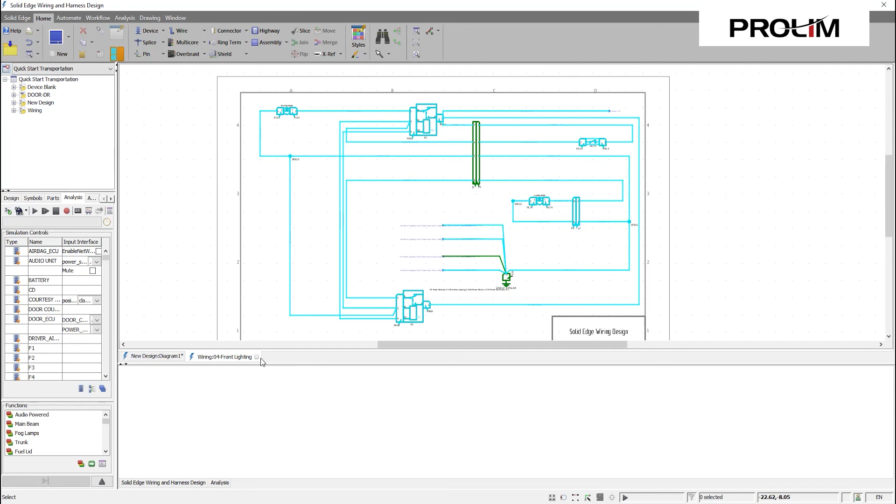So I'm going to close this and open up one more thing here. Look at my device blank. Again, now we're in the scenario where we're not really sure what we need, but we just want to start laying some stuff out.

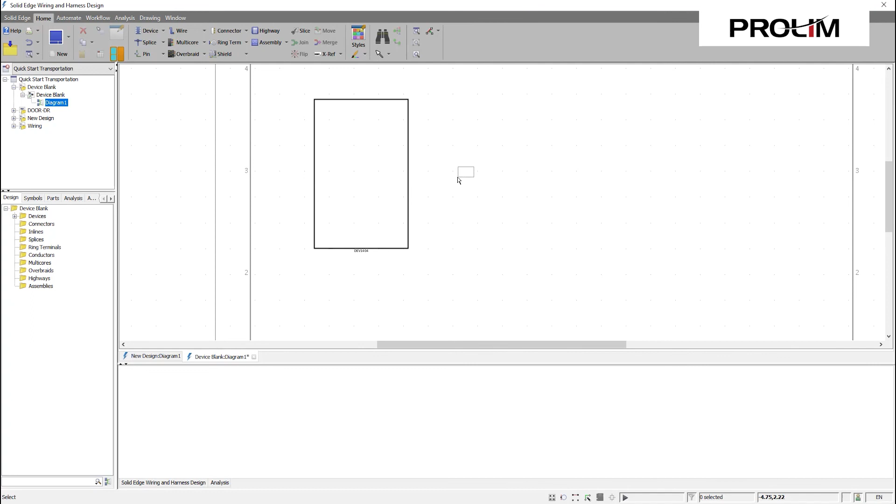So we have the ability to go in and just create a device, and again it's very simple. It's snapping to that grid, which is what we want. We're just going to throw two quick things down here. You can see the device comes in with no real detail. If we want to change or manipulate it once we have it set in place, we can. Now we're going to create a couple of pins for this device.

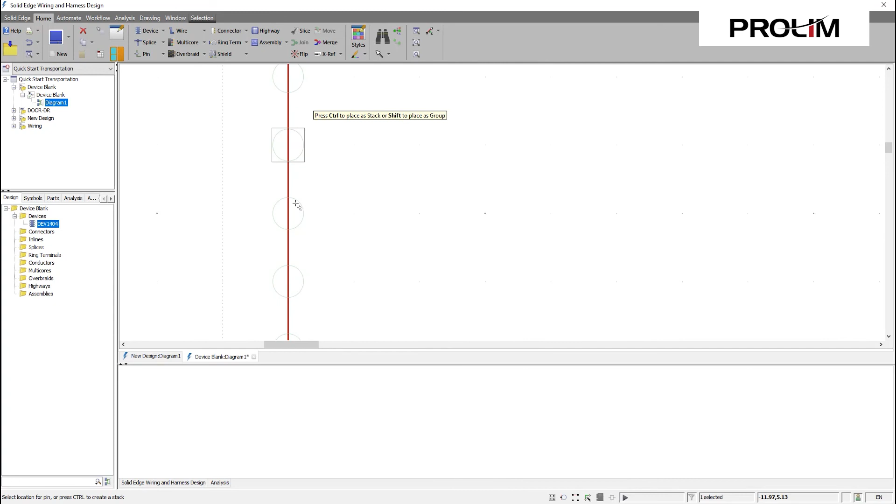So I can create individual pins, and it's kind of hard to see, but when you zoom in you can see all of the predefined pin locations that you can select, and that's based on some electrical standard. So I'm going to say I've got a few pins.

There we go. And now that I've got the pins in place, I still have the ability to go in and change these things around as needed. Not really sure what I need just yet, but I'm going to just create some stuff.

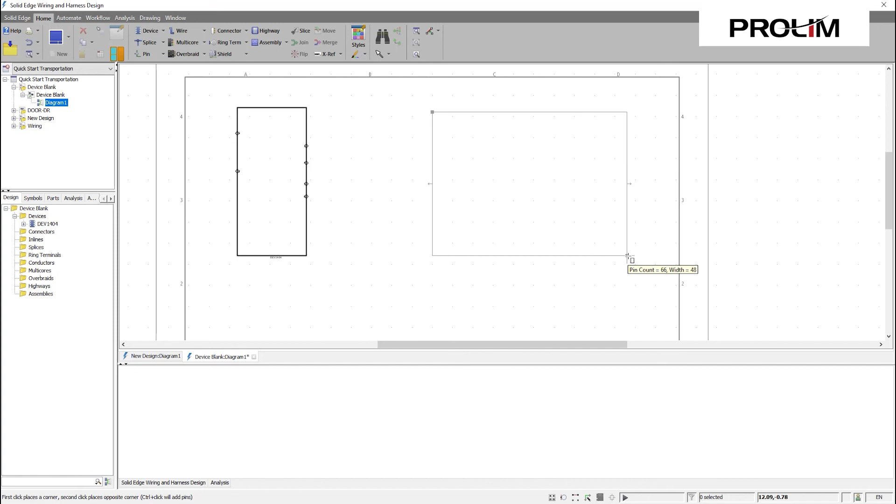So here's another device, we'll create this one over here. You can tell the window above the cursor gives us an idea of, based on the width and size of this device, how many pins we can get in this one device. Again, this will all be based on your company standards and electrical standards you follow. But we'll run through this process one more time, creating a couple more pins.

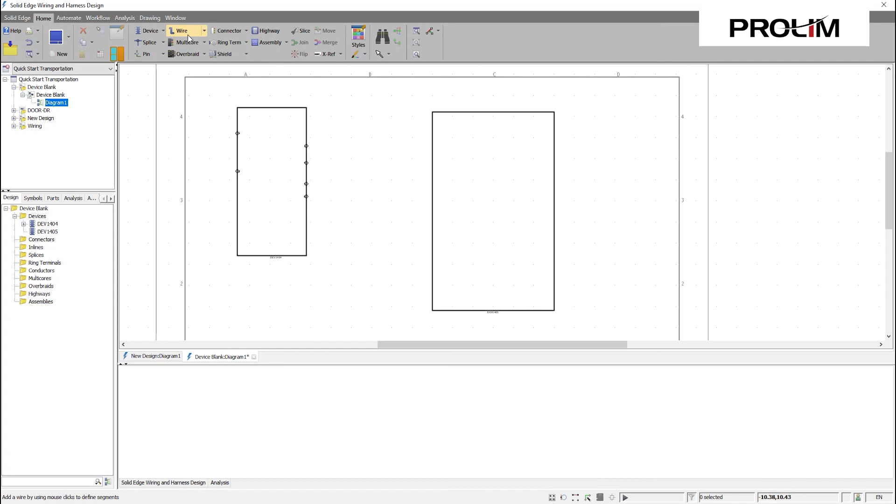Okay, so now we've got the pin set in place. We've got two devices here, again very generic. We're just trying to lay some stuff out to figure out what we need.

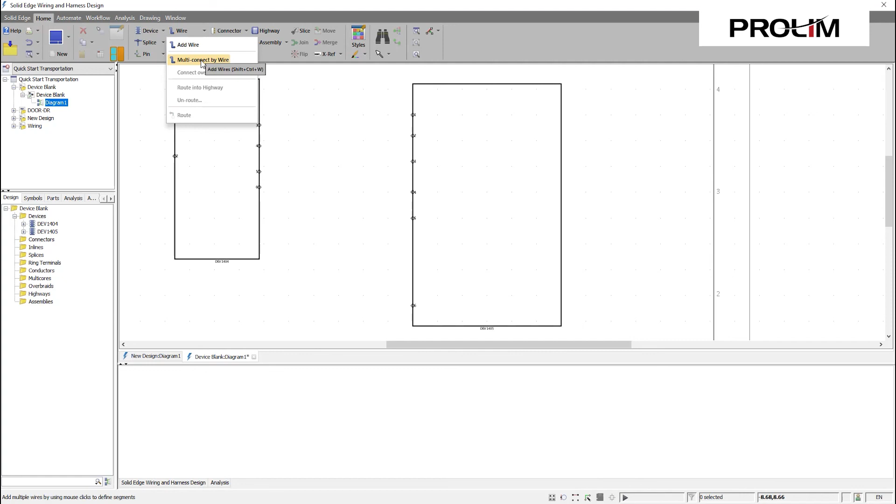And now I'm going to add a couple of wires here, and I want you to see something that's really cool. We also have the ability to do multi-connect by wire, and it'll give you a quick preview of what we're looking to do here. Let's say, for instance, we want to take these four pins and create a wire that connects to these four pins. So I hit enter to accept, and you can see it automatically populates and auto-routes the parts based on my need.

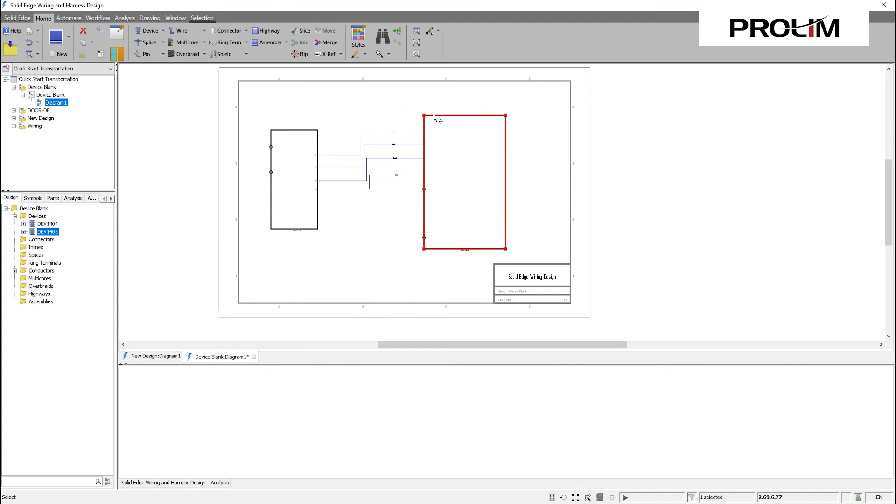I even have the ability to move these parts around, and you can see no matter what the placement is that I'm manipulating, it's automatically updating and reconfiguring the placement of these wires based on the standards that are set in place. So we're never able to overlap wires. It's all a very intelligent, easy to use tool.

So in summary, we discussed the electrical industry trends and leading technologies. We saw the ability to create intelligent diagrams and schematics that hold us to the ever-growing electrical standards and disciplines we see today. We explored electrical libraries and the simplicity to add and pull from them. We reviewed the harness design environment and created a few new wiring designs. We then applied some styling attributes to the designs, and ran simulation studies to confirm functionality of our designs.